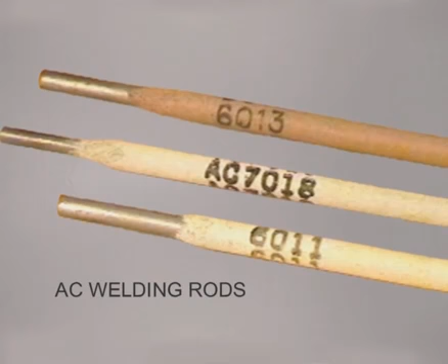Whether your welding machine is electric or portable, the power source will provide either alternating current or direct current to the electrode. Alternating current flows in both directions, creating an amperage lag. Certain welding rods have been designed with stabilizers in the flux to help maintain the arc through these lags.

Direct current welding machines provide a steady flow of current in one direction. The direction of flow, called polarity, is determined by how the leads are connected to the welding machine. DC plus with electrode positive is the polarity typically used for shielded metal arc welding. All the common rods used for welding on carbon steel have characteristics that make them better suited for different situations.

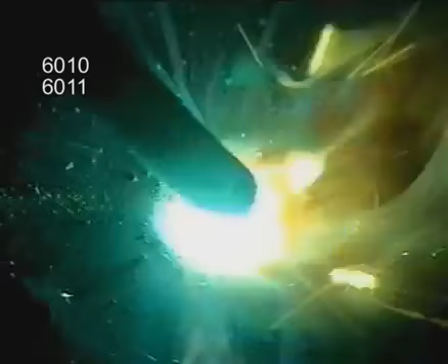The fast freeze rods have a strong arc force that helps burn off surface impurities. A circular or side-to-side motion can be used to build up weld, or because of the light flux coating, these rods can be whipped to provide maximum penetration. In the vertical weld position, 6010 and 6011 can be run either uphill or downhill. These are good rods for tacking up weld joints, welding metal that is slightly rusted, filling gaps in poorly fit joints, and as a first pass for good penetration.

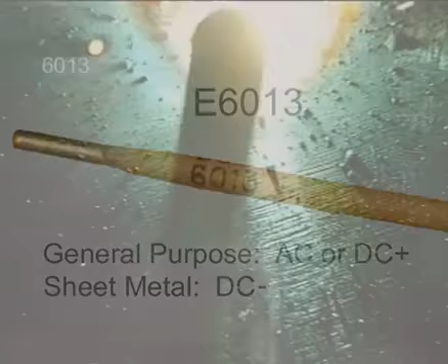The filler rods don't penetrate as deep, they build up weld. Stabilizers in the flux make 6013 one of the simplest rods to use. With a slightly heavier slag covering, try to keep the arc in the puddle. 6013 can also be run either up or down on vertical welds. For general purpose welding, 6013 produces a smoother finished weld bead.

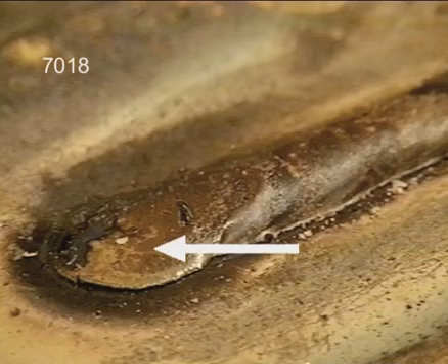7018 contains iron powder in the flux and low hydrogen characteristics. Except for directly under the arc, a heavy slag covers the entire weld puddle. Either running straight or with a side-to-side motion, the arc needs to be maintained on the leading edge of the puddle. In the vertical position, 7018 is run uphill.

7018 requires better rod control, but does provide the strongest welds for heavy stress situations and also the smoothest welds for ornamental type projects. Welding rods are available in different amounts, and it's a good idea to have both fast freeze and filler rods on hand.

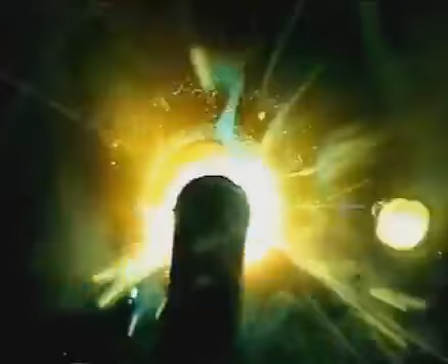Cover yourself up. Wear some good gloves, a hat, keep clean lenses in your welding hood, and always wear safety glasses. Before you light the rod, get comfortable. Scratch to light the arc. Bring the rod back and start the puddle. Maintain a uniform arc gap with the amperage set high enough to let the puddle spread out.

The molten metal follows the heat. Make sure you're filling in along the edges to avoid undercut. Add a little extra metal to the puddle before pulling out back over the weld. You should always examine the finished weld bead for any defects, but really, you need to see the weld as it's going in. This is a totally manual process.

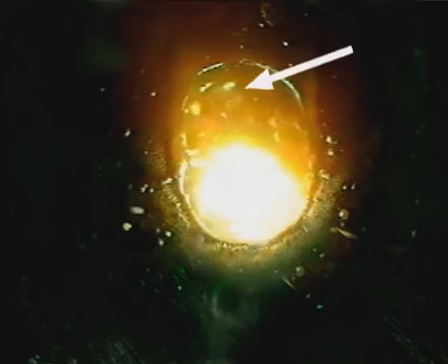You have to control the heat and filler metal during the weld by watching and understanding the molten puddle. Look past the rod and the light, focusing directly on the molten pool. Watch the edges and the weld buildup, constantly analyzing how it's flowing out and how fluid it is, making slight adjustments when necessary. The amperage setting, which regulates the amount of current flowing through the rod, is the main control of the heat available to the weld.

When the amperage is set too low, the puddle only forms under the rod. Increasing the amperage generates enough heat to form a molten pool. Along with starting to get penetration, this is where you begin to have control of the edges of the puddle and the weld buildup. There isn't an exact amperage setting here. In fact, this is one of those things that welders see differently. Also, as the metal thickness or weld position changes, the amount of heat required will be different.

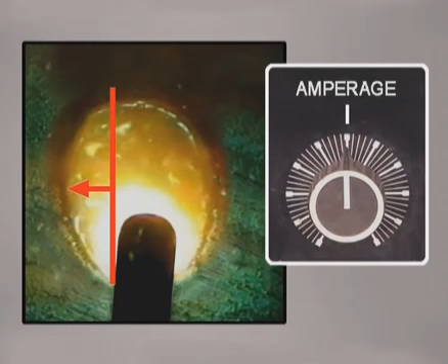Watch the puddle. You're looking for it to flow out to the sides of the rod. When the amperage is increased more, the molten pool penetrates deeper and spreads. Eventually, the filler metal becomes so fluid and agitated you can no longer control it. Experiment with the amperage setting. For good penetration and smoother welds, you want the amperage set as high as you can while keeping the molten metal from becoming too fluid to handle.

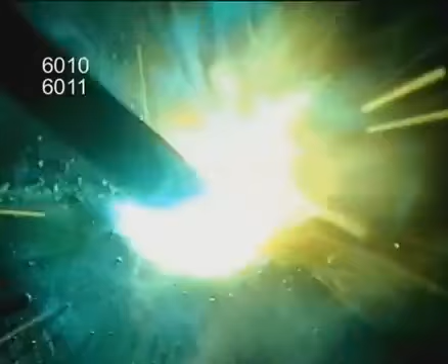Because of the characteristics of the flux coating, the puddle will look different depending on the type of rod you're using. The entire puddle is visible with 6010 or 6011. Slag covers the top rim of 6013, but the molten metal is still visible on the sides, and the puddle should move easily with the rod. With 7018, slag covers the entire puddle, but you still want to see it flowing out to the sides, with the slag solidifying back from the rod.

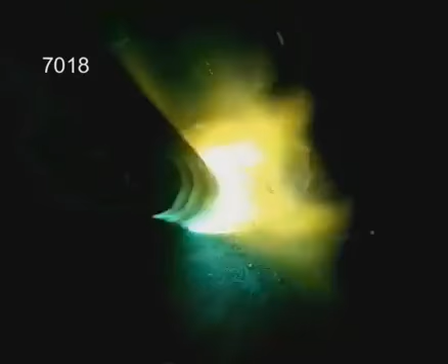During the weld, the filler metal is actually solidifying underneath while the slag stays molten. In the horizontal or vertical position, the slag can run or drip. Don't let this fool you into thinking the weld is too hot. You'll probably need to experiment more to set the amperage for 7018, but you will get better results running a little to the hot side.

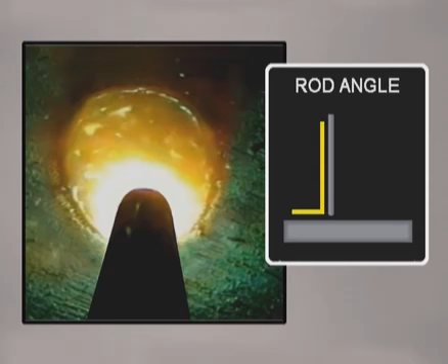Regardless of which rod you use, the amperage only provides the heat. The rod angle determines how fast the metal will heat up. When the rod is held more perpendicular, the molten pool forms and spreads quickly, allowing a faster travel speed to limit penetration on thinner metals, deposit less metal for a smaller weld, or flatten the bead in a bevel. As the rod is angled, some of the heat is taken off the metal. A slower travel speed can be used to build up a crowned weld bead.

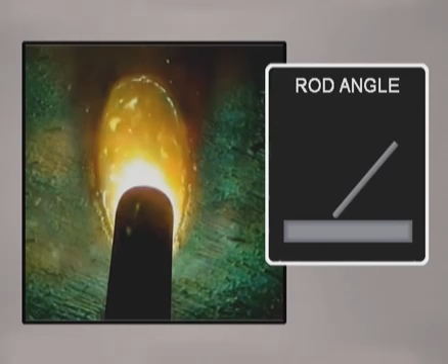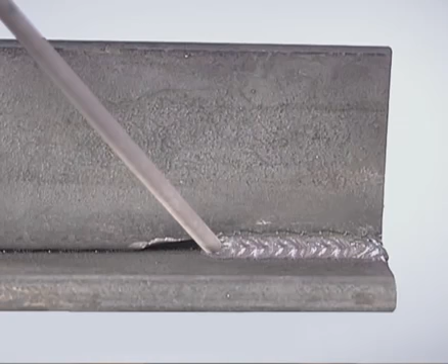If the rod is angled too much, the metal won't get hot enough. The molten pool will narrow, the bead will stack up, and you'll lose control of the edges of the puddle. On most weld joints with a good fit-up, you want to maintain a consistent rod angle to produce a uniform weld bead. In some situations, though, you may need to vary the rod angle during the weld. To fill a gap in a weld joint, the rod can be angled more, slowing down to deposit more metal, keeping the build-up uniform, then angled back up to finish the weld.

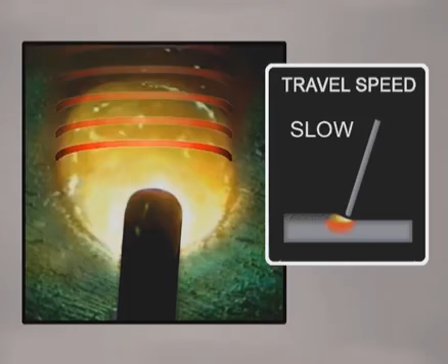Controlling the rod angle takes a little practice, but you need to stay loose and relax. Whether you're holding the rod up to flatten the bead or angling it to build up weld, you want to travel at a speed that keeps the molten puddle the same size. Watch the puddle. If the travel speed is too fast, the metal doesn't have time to melt, so the puddle narrows. If the travel is too slow, the metal gets hotter and the puddle spreads. Depending on the rod, the filler metal may flatten out or stack up and roll. Always maintain the size of the puddle with the travel speed.

Last is the arc gap, which is the distance from the tip of the rod to the metal. Shielded metal arc welding machines use a constant current power source. The amperage is set with the voltage varying to maintain the arc. You want to avoid jamming the rod right down against the metal or long arcing too far, but you can use slight variations in the arc gap to help control the heat and shape the weld.

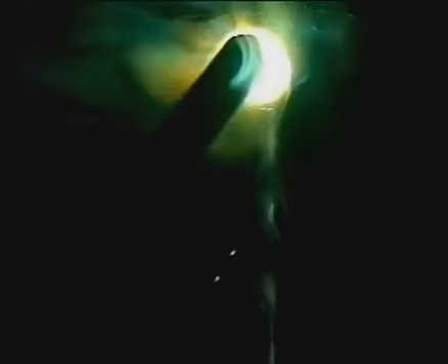This is difficult to measure, but a medium arc length is used to build up weld. Shortening the arc reduces the heat, cooling down the weld puddle. Try using a shorter arc gap on vertical up with 7018 when you want to build up more weld. Slightly lengthening the arc causes the heat to increase, spreading the puddle out, and is used with a more perpendicular rod angle for making smaller beads or flattening the weld on heavier metal. It is important to be consistent though. Varying the arc gap during the weld changes the heat, making it difficult to maintain a uniform weld puddle.

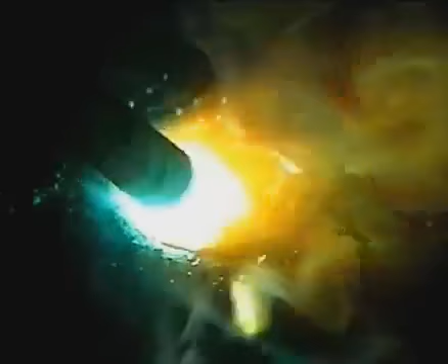When you start looking at all the aspects of running a weld bead, there are many possibilities. That's why everybody welds a little different. Practice and experiment, trying to make that puddle do what you want it to do. Watch other welders if you get the chance, but in the end, you need to see the weld puddle at the end of your rod and develop a style that works for you.

We've been looking at heating the metal to allow the molten pool to penetrate and fuse. All that heat also has an effect on the base metal itself. Metal is made up of groups of atoms bonding together to form grains. When metal is heated past a certain temperature and cooled quickly, smaller grains are formed, making the metal harder. Cooling the metal slowly allows more atoms to bond, forming larger grains, which makes the metal softer. In welding, the metal adjacent to the weld bead becomes hot enough to change the structure of the grains. Because only a relatively small area is heated, the metal cools quickly, forming smaller grains and becoming harder right alongside the weld.

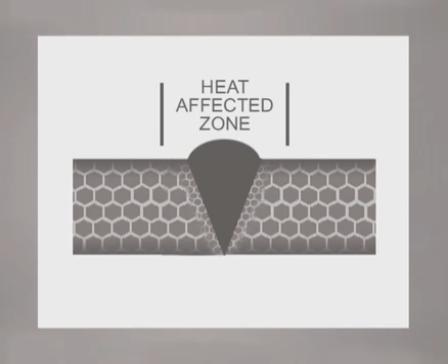Welding also causes the pieces of metal in the joint to draw. Heated metal expands, so during the weld, the molten filler metal is deposited in its maximum expanded state. As it cools, it contracts. When the metal is free to move, it will draw in the direction of the weld.

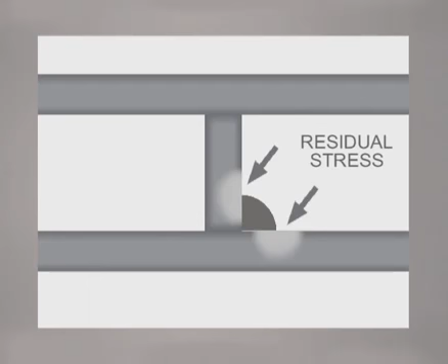If the pieces being welded are trapped, the molten weld metal still contracts, leaving some residual stress in the metal. There isn't any way to stop this. The metal is going to move. Whenever possible, weld on both sides to reduce the draw, and on pipe or square tubing, use a sequence of welds to help control the draw.

Extreme differences in temperature do have a greater effect on the metal. If it's freezing cold, use a torch to heat the metal up a little. Condensation will appear, and just warm it up until the moisture dries. Also, if you are welding on harder, higher carbon steel, which does not handle expansion and contraction very well, a preheat may be necessary to prevent the weld from cracking as it cools.

As always, there are a lot of variables, the type of steel and the stress that will be put on the finished product. In most cases, projects are designed so that the stress put on the weld joint does not come anywhere close to the maximum strength of either the metal or the weld.

Try to complete the weld once you start it and avoid building up more weld than necessary. When you're finished, let the metal cool slowly. If the metal does break next to the weld, you may need to take a closer look at the thickness of the metal being used and the overall design. Okay, let's take a look at putting two pieces of metal together.

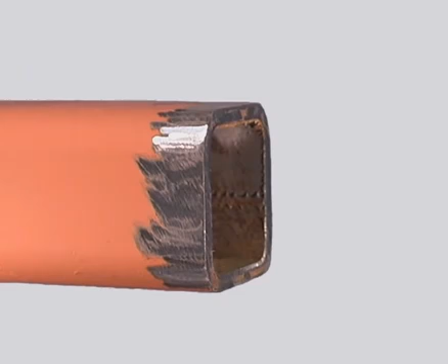The first steps with any type of weld joint are metal preparation and joint fit-up. If you're working with new metal, most of the rods can handle the mill scale, which is a dark layer on the surface. Use a grinder to clean any metal that's rusted or painted. Impurities on the surface can cause porosity, lack of fusion, or even interfere with the arc. When you're cutting metal, keep the edges straight and square. If you use a torch, chip or grind off any slag left from the cutting process.

During fit-up, use good tacks to hold the pieces together, and if you're leaving a gap, keep it uniform. Irregular gaps in the joint not only take longer to weld, they make it way more difficult than it should be. You can avoid a lot of problems by cleaning the metal and taking your time on fit-up.

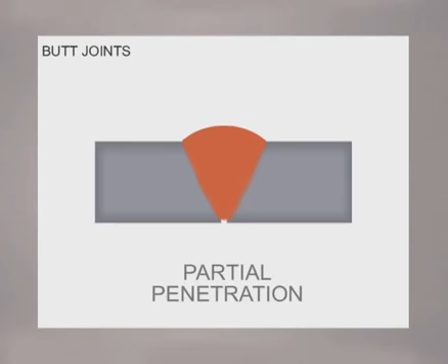While there are many variations of weld joints, there are generally considered to be 4 types: butt joints, lap joints, T-joints, and corner joints. On a butt joint, the weld should penetrate deep, with the amount of weld deposit at least equal to the thickness of the metal. For maximum strength, 100% penetration welds are used to completely fuse the edges.

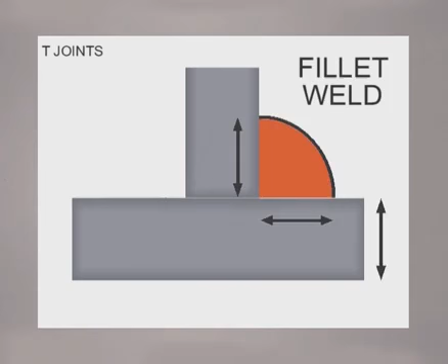On a lap joint, the weld is called a fillet, with the legs coming up and out a distance equal to the thickness of the metal and the weld slightly crowned. A fillet is also used on T-joints, where the edge of one piece is joined to the surface of another. Welding on both sides reduces the amount of weld necessary and overall produces a stronger joint. Corners are joining the edges at an angle, with metal preparation or fit-up allowing for sufficient penetration and weld deposit.

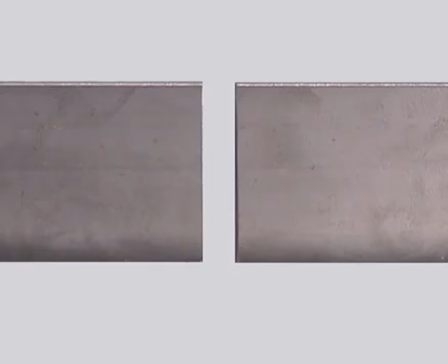Let's start with butt joints, and this can be on plate, flat bar, angle iron, pipe, or square tubing. When the metal is around 1/8 of an inch thick, keep the edges straight and square for a perfect fit. You'll generally get good enough penetration just butting the pieces together, especially if you can weld on both sides or all the way around. On plate or flat bar, tack right on the outside edges to help carry the heat. For square tubing, tack the corners, then weld opposite sides from tack to tack.

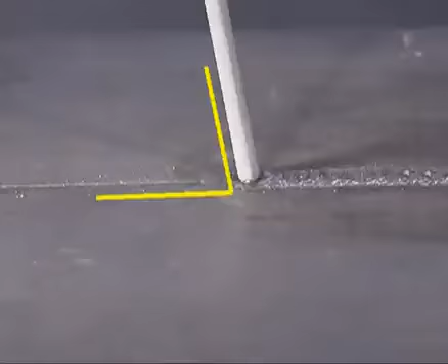If you intend to grind the weld off for a smooth finish, you can leave a very slight gap, but keep it uniform. Whenever possible, start at the outside edge and weld towards more metal. In the flat position, hold the rod fairly perpendicular to the metal. You can weld with 6010 or 6011 using a circular motion. Turn the amperage down a little, but you're going to have to travel faster to control penetration and avoid burning through. For a smoother finished bead, try 6013 or a 3/32 7018 with a side-to-side movement.

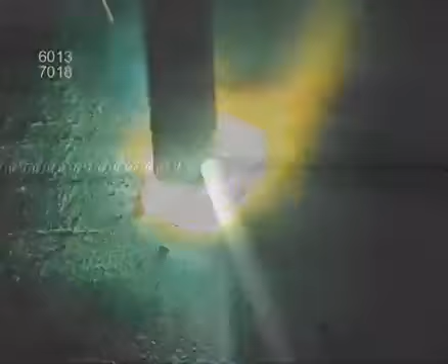On a horizontal, hold the rod nearly perpendicular to the weld. Watch the puddle. With 6010 or 6011, adjust the travel speed to let the puddle spread out without overheating the metal. Watch the top side to avoid undercutting. With 6013 or 7018, try running straight without any rod movement, maintaining a uniform arc gap and travel speed.

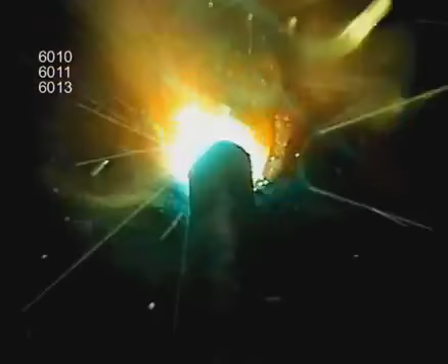If you can position the joint, butt welds on 1/8 metal are easier welded vertical down. 1/8 metal is fairly thin for stick rod, so use some practice metal to figure out the amperage and adjust your travel speed.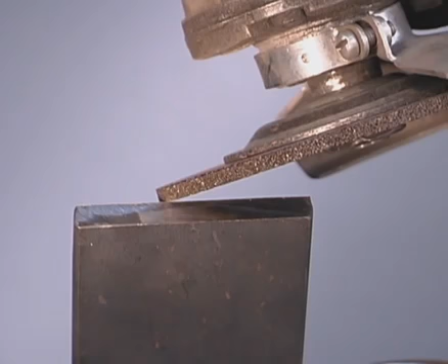Starting at 3/16 of an inch, you want to bevel the edges to allow for good penetration. Bevels are generally around a 30-degree angle with the top edge straight and a flat spot called a landing on the bottom. Hold the grinder at a slight angle, using the bottom corner of the disc to take off metal. When you have it close, hold the grinder flat to smooth the bevel and straighten the top.

On heavier metals, it may be easier to cut the bevel with a torch, then finish it with a grinder. The reason for beveling the edges is to control the puddle deep in the joint. If the bevel isn't wide enough to get the rod into the bottom, you can always take the grinder up on edge, slightly cock it, and use the curve of the disc to open the bevel up a little more.

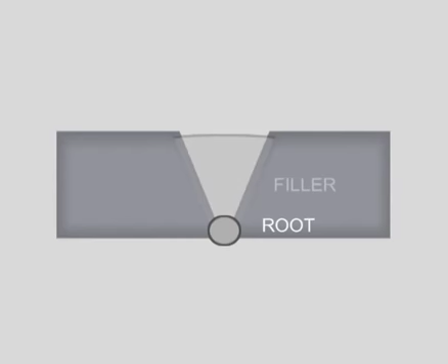A beveled butt weld can be divided into 3 parts: the root, which is the first pass fusing the bottom of the joint, the filler, and the cap. There are several options in fitting up butt joints, and the main difference is how the root pass is welded. The bevel pieces can be fit up with a small gap, allowing the first pass to penetrate as deep as possible.

For 100% penetration, either a backup bar is used, with the first pass fusing all 3 pieces, or the metal is fit up with a gap, and the root fuses the bottom edge and actually builds weld on the back side. After the first pass, filling and capping is basically the same, so let's take a closer look at getting the joint started.

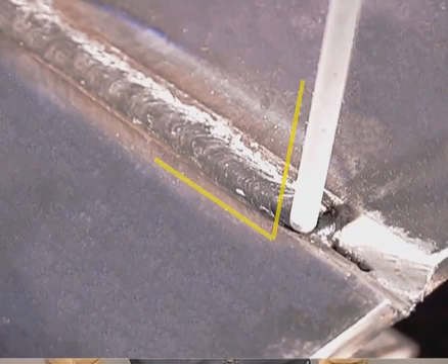Anytime you weld in a bevel, you want to hold the rod fairly perpendicular to the metal to flatten the top of the bead. If you angle the rod, the weld bead will crown, leaving slag that may get covered on the next pass. You also want the weld buildup even. Use a grinder to knock down any high spots from stopping and starting. It's a lot easier to keep it uniform with a grinder than to try to fix it with the next weld bead. Also, if the bead does crown in the bevel, use your grinder to knock off the top to avoid trapping slag.

Not all welding situations require 100% penetration. That depends on the type of stress placed on the joint. But you always want to bevel the metal, leaving at least a small gap. 6010 or 6011 will provide good penetration, and for the first pass are a little easier to deal with in any of the weld positions. You can use a whip or step motion, gouging into the metal for penetration, then pushing the puddle in to fill. Watch both sides to avoid undercutting along the edges.

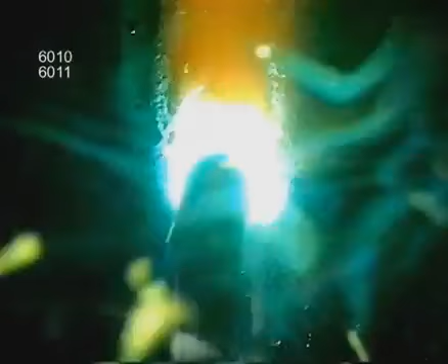For more weld buildup, try using a modified circular motion, always coming back to the leading edge of the puddle in the bottom of the joint. If you can handle the puddle, you can also use a filler rod. With 6013 or 7018, hold the rod fairly perpendicular. Use a slight side-to-side movement and avoid jamming the rod into the sides. Depending on the bevel and gap, you may need to follow the metal to maintain a uniform arc gap.

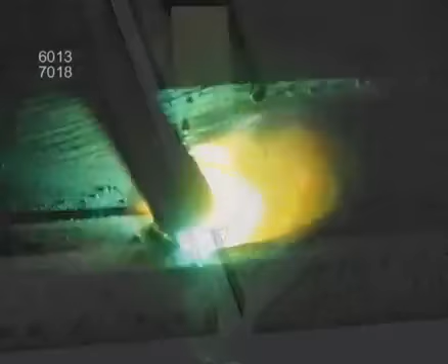The base metal is getting thicker as you come up the bevel, taking more heat. During the weld, you want to see the edges of the puddle flowing out and tying in on the sides of the bevel. After the first pass, chip the slag, clean it with a brush, and you're ready to fill and cap. If you can get to both sides of the metal, you can weld the backside for a stronger joint. Grind down to clean metal, keeping the depth and width uniform. With the rod angled a little more, slow the travel speed and build up welds slightly wider than the groove and above flush with the surface.

Some welding situations require complete penetration for strength. If the pieces being joined do not fit up perfectly, or with some grades of hardened steel that tend to crack on the first pass, a backup bar is used. A V-bevel with a backup bar is also the procedure for structural welding tests. The goal is to melt and fuse the bottom edges of the pieces being joined to the backup bar.

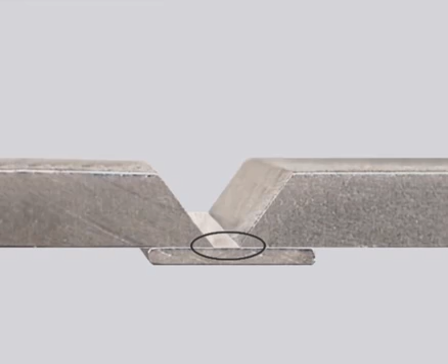Prepare the bevels with slightly less of an angle and a feathered edge. Grind off the mill scale on the backup bar. Only a narrow strip is going to get tied in, and you don't want surface impurities taking the heat. Fit the backup bar tight with around 1/4 of an inch gap. This type of joint is generally welded all the way with at least a 1/8 7018, and you have to be able to get the rod all the way to the bottom.

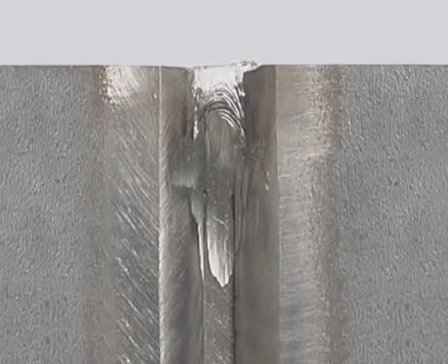Either tack up on the backside, staggering the tacks, or in the bevel. When you tack in the bevel, grind the starts and stops thin. Always keep in mind, along with fusing the pieces at the bottom, you also want the top of the weld relatively flat to avoid trapping slag.

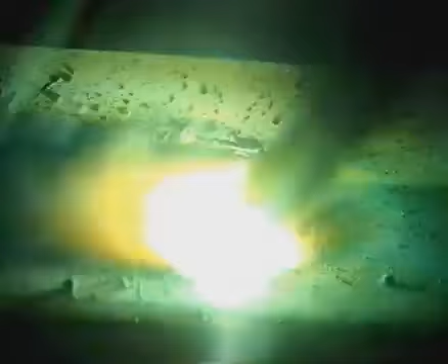In the flat position, hold the rod nearly straight up and down, angled slightly back towards the weld. Keep the arc on the leading edge of the puddle. With a slight side-to-side movement, pay attention to the arc gap. You want to see the edges of the molten pool tying into the sides of the bevel to avoid crowning the bead. When you're using 7018 in a bevel, stay ahead of the weld buildup and slag.

If molten slag is pushed in front of the rod, it can interfere with the arc or limit filler metal fusion along the sides. On vertical up welds, you won't have any problems fusing the base metal to the backup bar. You do want to keep the weld bead flat without undercutting along the edges. Keep the rod fairly perpendicular to the metal, angled up slightly. The puddle needs to flow out on the sides for a flat weld bead and to avoid undercutting.

Travel up fast enough to keep the metal from overheating, which causes the molten puddle to spill down. You may need to lower the amperage a little, maybe 5 amps or so, but don't lower it too much, as many problems are caused by running too cold on verticals as by running too hot. Remember, the amperage only provides the heat. It's the travel speed, rod angle, and arc gap that determine just how hot the metal is going to get.

On overhead butt joints with a backup bar, you don't get to build up quite as much weld bead. With the rod nearly straight up and down, adjust the travel speed to let the puddle spread out without overheating the metal. Most of the problems with overhead come from not controlling the rod. When the tip dances around, varying the arc gap, the amount of heat at the weld is not uniform and focused. Find some way to steady yourself so you can control that rod. Also, if the rod is angled too far back towards the weld, the molten filler metal takes the heat instead of the metal, causing the puddle to drip.

Horizontal is generally not used for welding tests, but you often get them in practical situations. Angle the rod up and slightly into the weld. The bottom bevel acts as kind of a landing, helping to hold the weld, so you may be able to use a slight rod movement. Watch the top side and push the puddle up. Set the amperage to allow a fast enough travel speed so the base metals don't overheat, which causes the puddle to become too fluid. Don't try to carry a lot of metal on a horizontal. Just get all the pieces tied together and keep the filler metal from sagging.

The last type of root is in a V-beveled open butt joint. We're going to shove a 6010 rod deep into the gap and run a weld bead on the back side of the metal. Preparation and fit up are more critical, so take your time getting the metal ready. The edge of the bevel needs to be straight and square. Grind off all the mill scale on the bottom side. A half-round file works good to clean up the inside of square tubing or pipe. The landing should be uniform. Use a file to knock down any high spots.

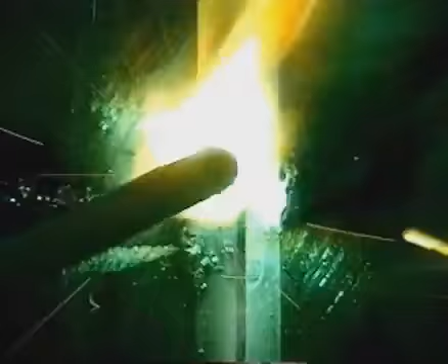With a 1/8 6010, I use a 1/16 oxyacetylene welding rod as a spacer with around a 16th landing. The size of the gap and landing can vary a little, but when you figure out what you like, try to keep it consistent for every weld you make. Line up the bottom edges of the metal. With a spacer to adjust the gap, run 1 tack, pushing the rod right down into the gap. Before you finish tacking up, remove the spacer. As tacks cool, they contract and the spacer gets jammed up. So pull the spacer, make sure the gap is uniform, and finish tacking the joint.

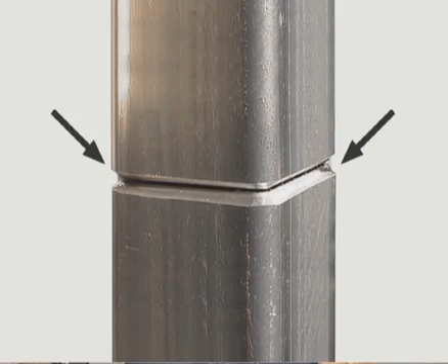On heavier pieces, after the first tack, use a small wedge or a screwdriver to keep the gap uniform. Because of the taper, you can remove these after the joint is completely tacked. On square tubing, tack opposite corners. For pipe, opposite sides. Make sure the gap is uniform, straightening when necessary, then put in 2 more tacks.

Flat, horizontal, overhead, and vertical down root passes are all done the same way. Grind the edges of the starts and stops thin. Hold the rod perpendicular to the metal. Scratch start right on the tack. Push the rod down into the puddle and start moving. The filler metal will squirt out the back until you hit the thinned out edge of the tack and it can poke through. Then move as fast as you can keep the gap filling in. If you're not getting all the way through, you will see filler metal squirting out behind the rod, back up in the bevel.

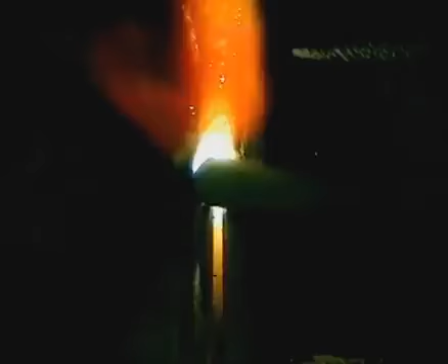Most of the light and sparks will be on the back side, and you're building weld on the back of the metal. You want the amperage relatively high, so try starting about the same place as you'd run flat. If you do open a hole, stop right away, pulling the rod back over the bead. Restart right at the edge and keep going. When you finish the weld, grind the edges thin on both sides of the hole and fill it in.

Some welding procedures require a vertical uphill root pass, and generally, you'll need to run about 5 amps lower for uphill. The easiest way is to prepare the metal exactly the same, with a uniform narrow gap, shoving the rod in perpendicular and moving up as fast as the gap fills in. Some welders like to thin out the landing a little more, and with a step motion, rip a small keyhole, then fill it in, rip a hole, and fill it in, always keeping the rod deep in the gap.

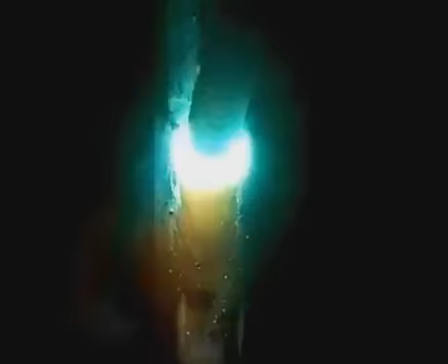Other welders like to leave a little thicker landing and wider gap, here again using a step motion, laying metal in and making sure it's fusing on the bottom corners. The disadvantage to stepping the root is the possibility of undercutting along the edges on the back side. The advantage is that you actually see the root going in for 100% penetration. Stepping the root uphill also works well when the gap is uneven, with wide or narrow spots.

The backside bead should be above flush, with the entire bottom edges of the bevels melted and fused. Any missed spots are called insufficient penetration. If the travel speed was too slow, the bead stacks up on the backside, causing excessive penetration. On the front side, because the rod was jammed right down against the metal, the bead will crown and undercut along both sides. Grind this out to avoid trapping slag.

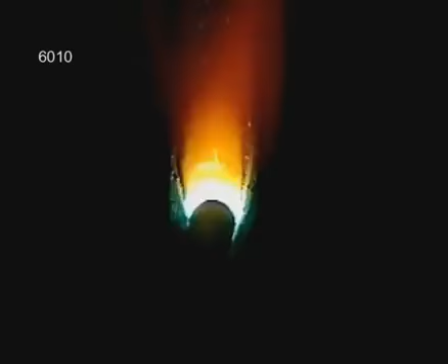The metal will be thin from grinding, so you need to run another bead called a hot pass to add a little more metal and burn out any slag left behind. With 6010, try stepping in the hot pass, not gouging quite as deep on the backstroke. Use a faster travel speed so you don't burn through, and watch the sides to avoid undercutting.

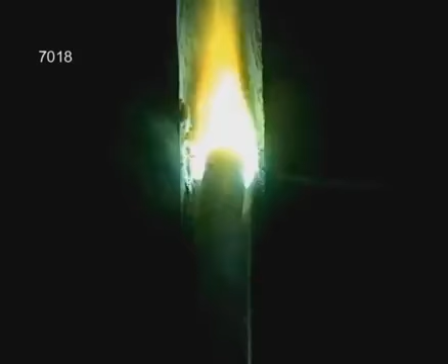You can also hot pass with a 3/32 7018. Hold the rod fairly perpendicular. Carry the heat on the sides, moving across the center relatively quick. Don't try to build up a lot of weld, and make sure the sides of the puddle flow out so the top of the weld stays flat.

Once the bottom of the joint is fused with any of these procedures, you're ready to fill and cap, and you will get better results using 6013 or 7018. If the metal isn't too thick, you may be able to finish with one more pass. On heavier metal, when more filler is required, remove all the slag between passes with a chipping hammer and wire brush. This comes with experience, but plan the weld.

When several filler passes are required, overlap the edges of the previous beads if possible. The last filler pass should be slightly below flush. Try to leave the top corners of the bevel. With a slight side-to-side movement, pay attention to the arc gap. Don't jam the rod into the sides of the bevel. Keep the rod fairly perpendicular and the puddle flowing out to avoid crowning the bead. You may need to speed up or slow down to control the amount of filler metal deposit, but try to leave the top corners of the bevel.

To cap the weld, angle the rod and slow down to build up a crown weld bead. Use the edge of the bevel as a guide to keep the sides of the weld straight. The finished weld should be as thick as the metal, so if you've penetrated deep, the cap only needs to be slightly wider than the bevel and above flush with the surface of the metal. Filling up more weld than you need doesn't add any strength, just takes longer and puts more heat on the metal.

If the top of the bevel is too wide to cap with one bead, run 2 or more passes side by side to cap the weld. With a slight side-to-side movement, using the bevel as a guide, keep the outside edge of the first bead straight. Use the inside edge of the bead as a guide for the second pass. Adjust the travel speed and rod movement so the puddle flows out almost to the center of the first bead. The final pass will generally be smaller.

Try holding the rod more perpendicular to the metal, running straight. Use a faster travel speed for less weld deposit. On a horizontal, angle the rod up slightly with a medium arc length. Try running straight without any rod movement.

The first bead will help hold up the second pass, so hold the rod more perpendicular and travel fast enough to keep the bead from sagging. For the final pass, try angling the rod down slightly. Travel faster for a smaller bead.

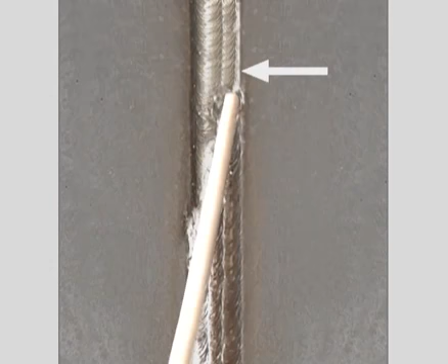On verticals, you can either use small beads side by side or run a weave bead. Small beads are easier. Use the edge of the bevel to keep the first pass straight. Run as many beads as it takes, but try to leave the other side of the bevel for a guide to keep the final pass straight.

If you're not limited to a maximum bead width by a welding procedure, you can try a weave bead. Start on one side, letting the puddle flow out to cover the edge of the bevel. Cross the center relatively quick to the other side and hesitate until the puddle flows out and covers the edge. Move the rod up a little, then cross, hesitate, move up, and cross.

The upward progress is going to be slow, heating the base metal up more, so turn the amperage down a little. Use the edge of the bevel as a guide to keep the sides of the weld straight. For a smooth weld and straight edges, maintain a uniform arc gap and keep the upward progression tight.

Weaving makes it possible to build up a lot of metal, but takes some practice to consistently produce a uniform finished weld bead. Whether you're filling or capping, you need to experiment with the amperage, rod angle, and travel speed, learning to control the amount of weld deposit and figuring out just how much metal you can carry without having it sag or drip.

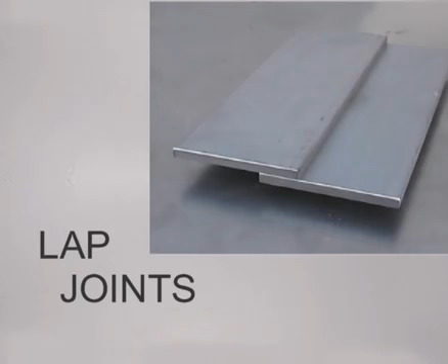With the butt joint, we were joining the edges of the metal. When one piece overlaps the other, it's referred to as a lap joint. The edge, and especially the top corner, is going to get hot and melt faster than the surface, where the heat is being dispersed in all directions. You want to fuse the bottom corner while building up a full fillet with a slightly crowned weld bead.

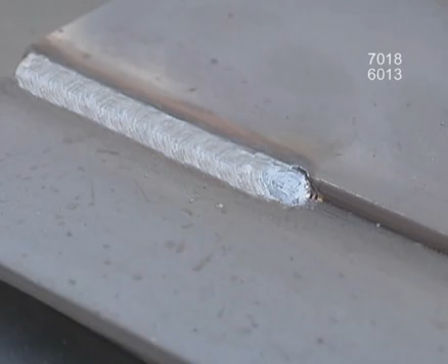Lap joints can be welded all the way with a fast freeze rod, but the filler rods will produce a smoother finished weld. In the flat position, the weld is called a horizontal fillet, and you have two rod angles to consider, one in relation to the metal and the other to the weld bead itself. In relation to the metal, the rod angle determines the position of the fillet in the joint. The angle in relation to the weld controls the shape of the bead.

Holding the rod perpendicular heats the metal quickly, spreading the puddle for a flatter weld. As the rod is angled back, the weld starts to crown. There are a lot of variables. You have to watch the puddle. With 6010 or 6011, hold the rod nearly perpendicular to the weld.

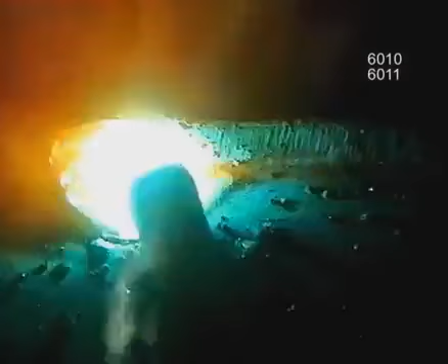With the arc on the leading edge, move the puddle into the bottom corner. Push it up to the top edge and bring the rod around to the leading edge. You may need to speed up or slow down to provide the heat, but always bring the arc back to the leading edge to fuse the corner. Watch the puddle flowing out to the top edge and tying in on the bottom.

The fast freeze rods provide excellent penetration, but tend to produce a flat or concave weld. Even on thinner metals, it may take a second pass to build up a full fillet. The filler rods build up a smoother weld. Maintain a constant arc gap for a uniform weld bead, adjusting the travel speed and rod angle so the puddle flows out all the way to the top edge.

Because the filler metal remains fluid longer, try running straight without any rod movement, keeping the arc on the leading edge of the puddle. On thicker metal, you may not be able to make a full fillet in one pass. You might be able to get it in two passes, the first one smaller and flat, then slowing down to carry more metal and crown the bead on the second pass. It might take 3 or more passes, and on heavy welds, use 7018 to prevent the bottom beads from cracking. Put the first one in fusing the bottom corner.

Chip off all the slag and wire brush the weld. Determine how far out the weld needs to be, and holding the rod straighter up and down, angled slightly back towards the weld, run a bead keeping the outside edge straight. Angle the rod more into the joint and perpendicular to the weld. Then run a second pass filling to the top edge.

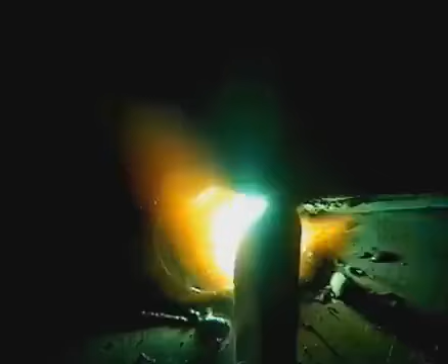Overhead fillets really are like flat welds, just more awkward. Angle the rod into the corner with slight adjustments for different thickness metals. Keep the rod nearly perpendicular to the weld. Watch the puddle flowing out to the edge of the lap piece. As long as you keep the filler metal and base metal from overheating, that weld will stay right up there.

On vertical lap joints, the outside corner is going to heat up a lot quicker than the surface. For vertical down welds, angle the rod up slightly. Carry the heat on the back piece. Move into the corner, pushing the puddle to the edge, then back out. Adjust the travel speed to stay ahead of the puddle and make sure you're on the leading edge of the puddle to move into the corner.

You aren't going to build up a lot of weld on a vertical down, so you'll probably need to run a second pass. Vertical up with 7018 will not only provide a stronger weld, you can also build up more filler metal in one pass. Always keep in mind that 7018 is very sensitive to the arc gap. You don't want to jam the rods into the sides or long arc across the center.

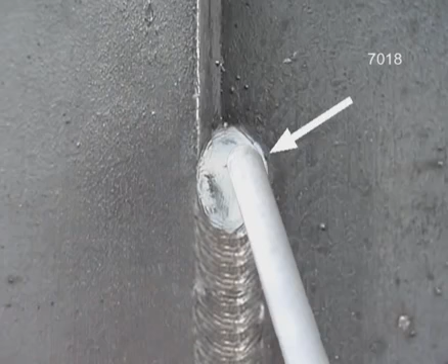Carry the heat on the back piece. As soon as the puddle flows out, move into the corner, letting the filler metal flow to the outside edge, even pulling the rod out a little if necessary to maintain a uniform arc gap. Then back into the corner and across, slowing down to let the puddle flow out. Keep the upward progression tight and use a high enough amperage setting so you don't have to wait for the puddle to tie in.

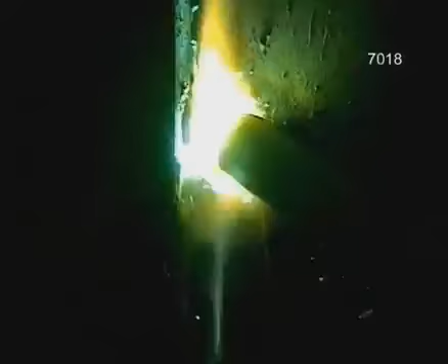If you have any trouble running an uphill fillet with 7018, try starting out with a 3/32 diameter welding rod. The smaller puddle is easier to control. You can also try stepping in a downhill pass of 6010 or 6011 first. This not only provides good penetration, it fills in the corner, making it easier to maintain a uniform arc gap for welding uphill. For heavier metal and more weld buildup, you can either stack weld beads side by side or use a weave bead.

Lap joints in any position are fairly easy to weld. The outside corner will melt away, especially on thinner metal. If the top edge isn't uniform, hold your grinder flat and skim along the edge to straighten it up.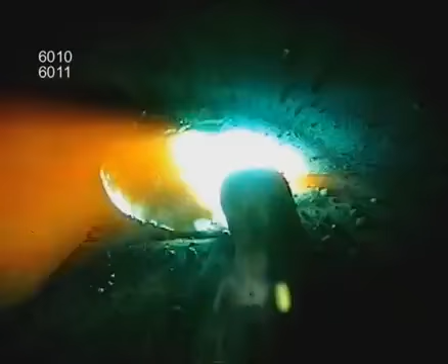Angle the rod to push the puddle up. Watch the top side to avoid undercutting. The filler rod, 6013 or better yet 7018, will provide more weld deposit. In the flat position, hold the rod nearly perpendicular to the weld, making sure the molten pool is flowing out both on the top and the bottom. Try running straight, maintaining a uniform arc gap and travel speed. If you need a bigger weld, try using a larger diameter welding rod or stacking up weld beads.

Overhead is the same as flat. Hold the rod nearly perpendicular to the weld, angled to push the puddle up. Maintain a uniform arc gap and travel speed, not letting the metal or the weld deposit overheat. For more weld, stack beads from the top down.

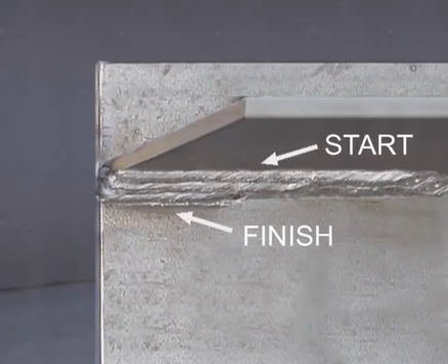On a vertical T-joint, downhill is easier. Use a modified circular motion, always coming back to the leading edge, then pushing the puddle out to the sides. Set the amperage high enough so the puddle spreads out and travel fast enough to stay ahead of the molten filler metal. Watch both sides to avoid undercutting along the edges.

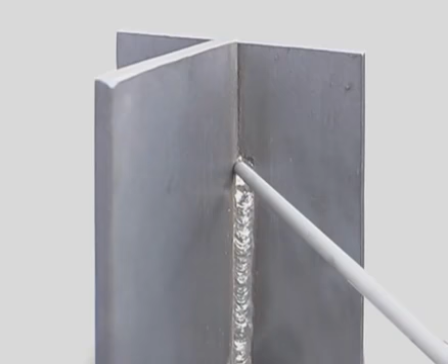7018 uphill will build weld faster. For the first pass deep in the corner, angle the rod up slightly. Pay attention to the arc gap, following the base metals into the corner and along the sides. This is very subtle. It's just a little movement into the corner as you're coming across, but jamming the rod into the sides cools the weld down, and long arcing across the center creates more heat.

Most of the problems with running uphill come from not maintaining a consistent amount of heat. When the arc gap varies, the heat varies, making it difficult to adjust the travel speed to keep the filler metal from spilling down. Try to maintain that arc gap. As soon as the puddle flows out to the side, move into the corner and across to the other side.

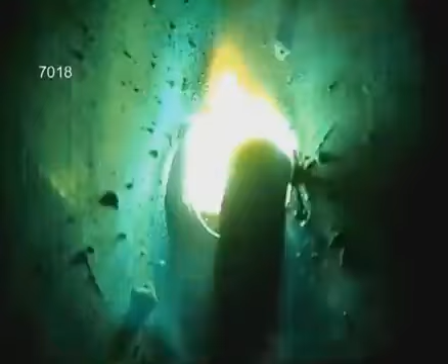Let the puddle flow out and move back. Set the amperage and adjust the travel speed so you don't have to wait too long on the sides. As you gain experience and physical control of the rod, you can try to carry more metal uphill. But while you're learning to weld, just get that first one deep in the corner, keeping it uniform and avoiding undercut. If you need more weld, maintaining the arc gap on the second pass is a lot easier.

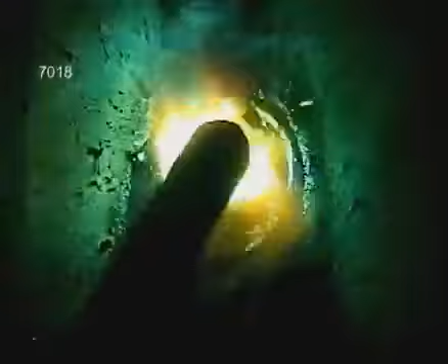Depending on the amperage setting, slow down or hesitate on the sides until the puddle flows out. Move across the center a little quicker, and slow down to let the puddle flow out on the other side. Then just side to side, keeping the upward progression tight.

For heavier metal and more weld buildup, you can either stack weld beads side by side or use a weave bead. T-joints in any position will draw in the direction of the weld. If you can get to both sides, alternate welding on one side, then the other until you're finished.

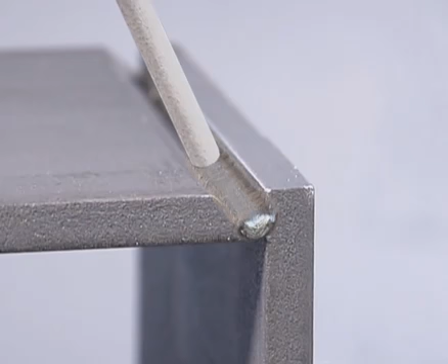Last is corner joints. Depending on the weld position and what you want the finished corner to look like, there are choices in preparation and fit-up to provide good penetration. One piece can be beveled at a 45-degree angle, opening it up so you can get the rod all the way to the bottom. The beveled edge is going to heat up quicker than the flat. Angle the rod into the joint, making sure the puddle flows out and ties into both pieces.

A first pass of 6010 or 6011 will provide good penetration and is easier to handle in the bottom of the joint. With 7018, try using a 3/32 diameter rod for the first pass, especially in the horizontal or vertical weld position. Keep the top of the filler beads flat to avoid trapping slag and leave the top edges as guides for the cap. On thinner metal, you can tack up the pieces without a bevel, then use a grinder to groove the joint. For ornamental type projects, you can grind the weld for a nice square corner.

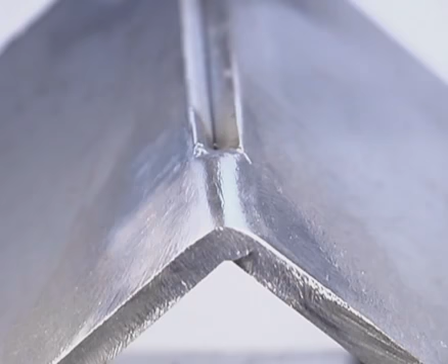Corners can also be fit up butting the inside edges. For maximum penetration, tack up leaving a small gap. This type of fit up requires less metal preparation, and for ornamental type work, the weld can be polished for a more rounded corner or ground flat for a beveled corner.

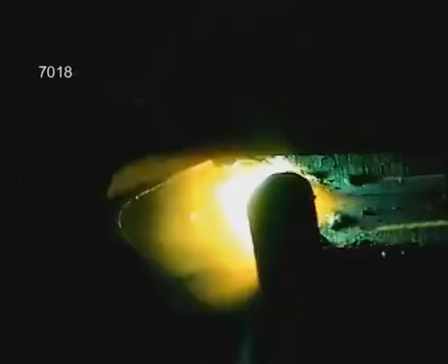In the horizontal position, angle the rod into the corner, fairly perpendicular to the weld, and maintain a uniform arc gap. When both pieces are the same thickness, they should heat up evenly and relatively quick. With 7018, adjust your travel speed so the puddle flows out to the top and bottom edges, but move fast enough to keep the weld deposit from sagging. Because both edges are heating up quickly, the filler metal will be more fluid, limiting the amount of weld buildup you can handle without having it sag.

If you need to make 2 passes to fill the joint, run the first one fusing the corner and out to the bottom edge. Use the second pass to fill in the top. On thicker metal, plan the weld, leaving a little of the corners for the final series of passes. In the vertical position, downhill will make a flatter weld and will probably require more than 1 pass.

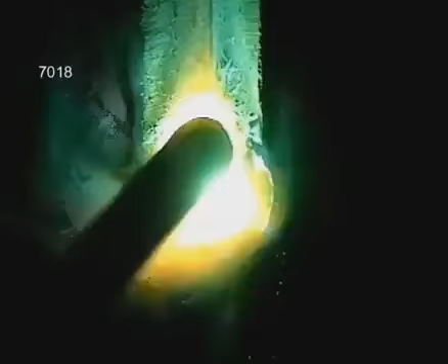For vertical up with 7018, the outside edges are going to melt fast, so try using a smaller diameter rod for better control. Pay attention to the arc gap, following the base metals into the corner and along the sides. Keep moving. You won't have to hesitate at all on the outside edges.

On any type of corner joint, you want the amount of weld to equal the thickness of the metal. If you have any concerns about the strength of the joint, you can make a fillet on the inside, but this will tend to draw the pieces in the direction of the weld. Whenever possible, always try to make the outside weld first.

Well, I hope I've given you an idea of how to put 2 pieces of metal together. There are many more options in metal preparation and fit-up to provide for penetration, limit the effects of the metal drawing, and reduce the amount of filler metal deposit. Regardless of the type of weld joint you're working on, you need to experiment with the amperage, rod angle, and travel speed, learning to control the amount of weld deposit and figuring out just how much metal you can carry without having it sag or drip.

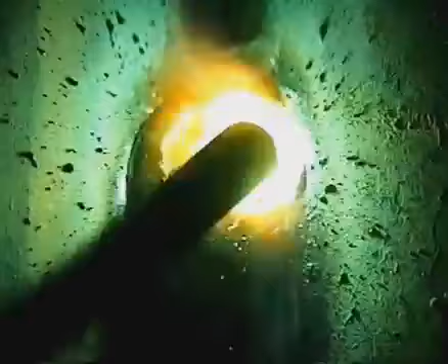Make slight adjustments in the travel speed when necessary to maintain the puddle and use the rod angle to control the shape of the weld buildup. Focus on the weld puddle, watching the sides tie in and keeping the filler metal from overheating. Above all else, take your time, have fun with this, and work safely.